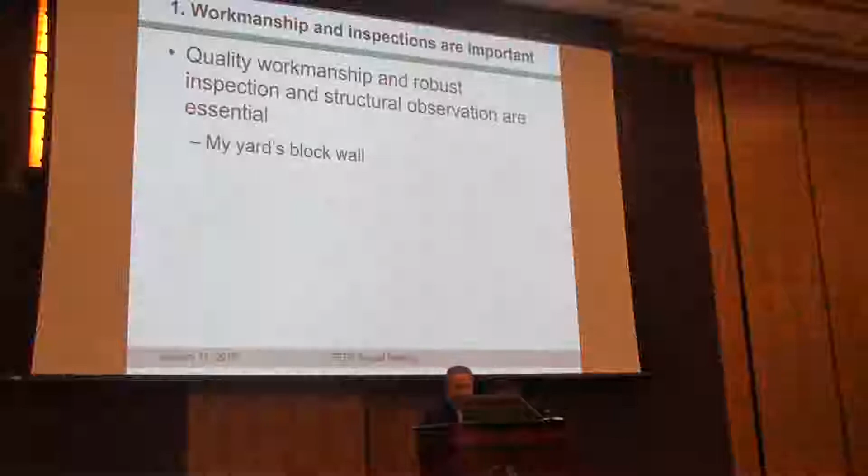I went and looked closer and saw that something is funny: the concrete is in one cell, and the rebar alone is in the next cell. I never imagined the contractor could be that stupid. So I called him in and said, what the hell happened, why did you do this? He said, I was watching you, I didn't think you were going to pour the concrete here and rebar in the other one, so I didn't come up front and look at it.

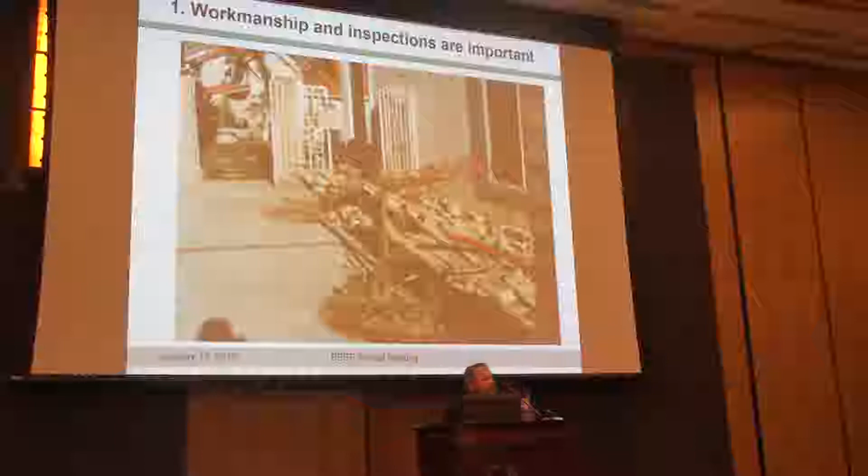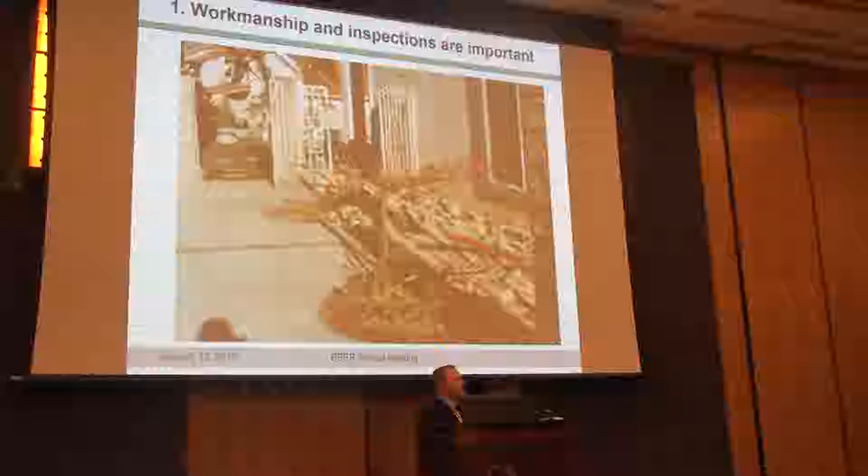And he gave me a very educated lecture on structural engineering concepts. He said, I did this because I wanted to do you a favor — the cell with the concrete was strong enough already, so I put the rebar in the next one so that one is strong too. And I said, thank you very much, please don't practice structural engineering from this point on. Yeah, here it is — that's for you, the rebar alone in one cell and concrete in the next one.

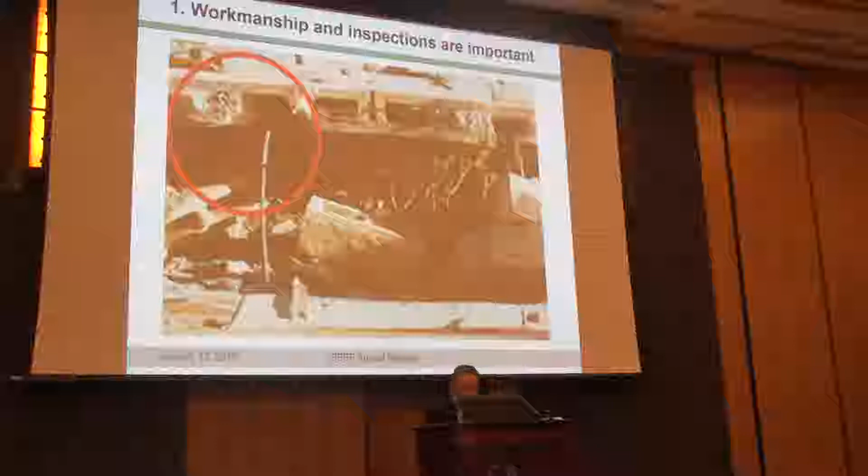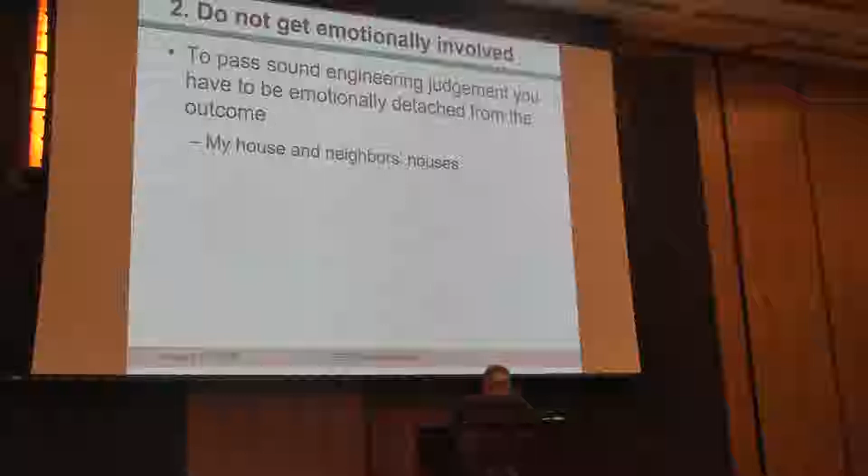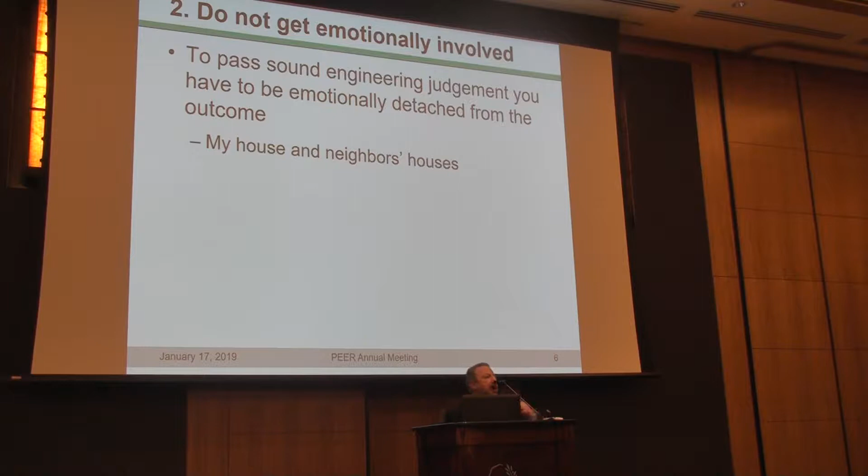Lesson number 2 that I learned from Northridge earthquake is that in order to pass sound engineering judgment, you should be emotionally detached from the outcome. The day after Northridge earthquake, I probably looked at 50 to 60, maybe 70 houses in the neighborhood, and I easily passed judgment: this one is okay, do this, be careful, don't go there. There were a couple that I said don't go in and stay out because they were separating the second floor from the first floor. But when it came to my own house, I really couldn't pass a sound engineering judgment because I would look at it and say, it looks okay, but hey, this is my kid, that's my wife. Should I? Shouldn't I? So I actually asked someone else to come in and pass judgment on my house. That's lesson number 2.

Lesson number 3 is PGA, peak ground acceleration, is important, but it is not that important. My example is this famous seismic station in a nursery in Tarzana, which is close to the epicenter of Northridge earthquake. This particular station's accelerometer graph showed a 1.78 g horizontal acceleration. When you go around that area, there was no damage that would really correspond to that. 1.78 g is basically end of the universe if it is widespread, but there was no damage to correlate to this. So I talked to my seismic friends, and at first they thought something was wrong with this instrument, and then they realized that actually there is nothing wrong with the instrument.

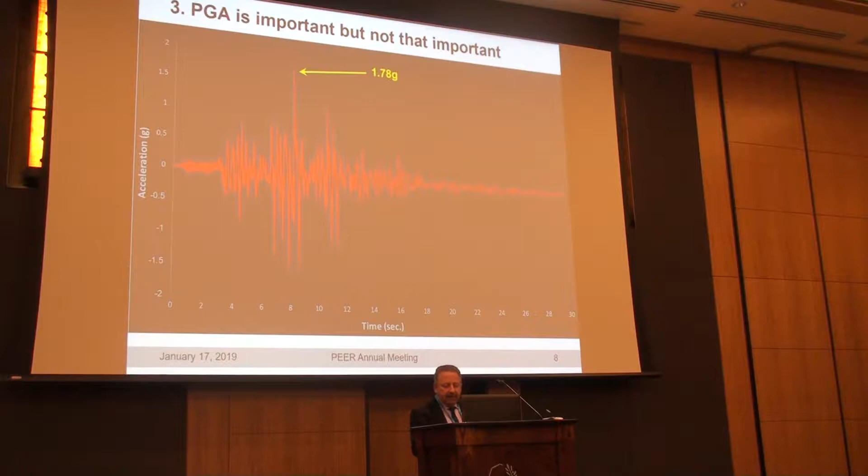If you want to get a little fancier, you can look at the spectra of it. You're looking at 5G spectral acceleration. That's a lot of spectral acceleration. But there was no damage. I don't know exactly what happened. I talked to people, they say probably there was some lensing effect around this or whatever. But what I learned from this was that I look at the PGA, I respect it, but I'm not going to put all my stock in what the PGA reading in one place is.

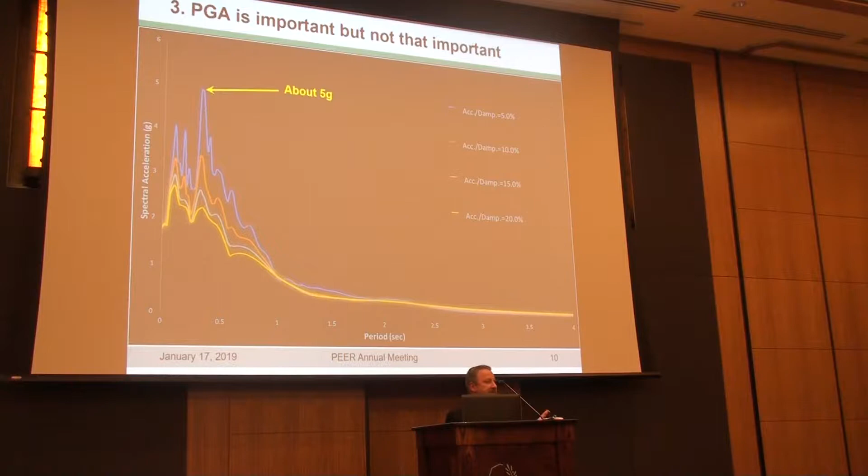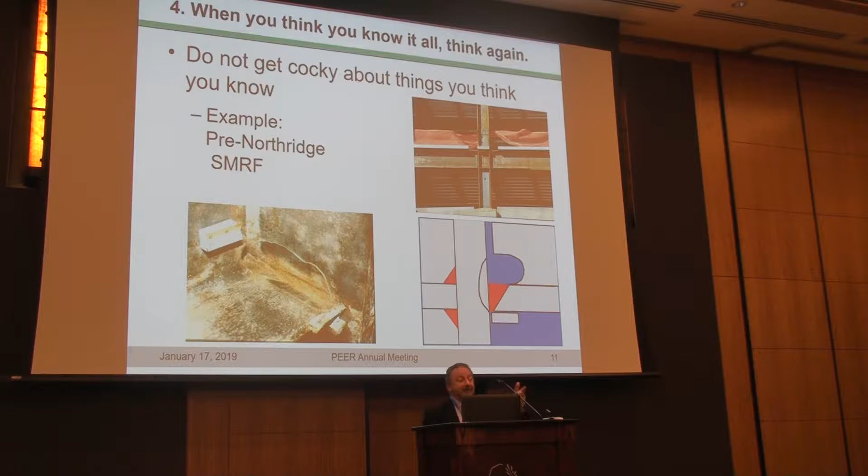Lesson number 4 is that when you think you know it all, think again. I vividly remember, I believed in it, a lot of other people believed in it, that after sliced bread and mom's apple pie, the steel moment-resisting frame is the best thing that has happened to human civilization. Everybody believed that. I vividly remember when Mike Engelhardt published his paper, I think in December 1993, which said something is wrong or fishy with the steel moment frames that we are using. I vividly remember that everybody poo-pooed him, and some people actually were thinking he should resign his academic position. It took just a couple of months for him to be proven right. So that's just one lesson. There are a lot of other things that we don't know, so we shouldn't be overconfident in what we think we know.

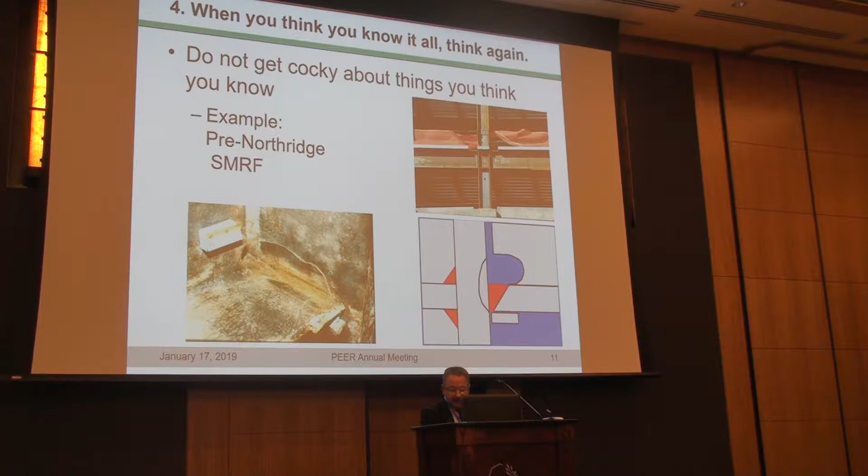Lesson number 5 is you better act when momentum is on your side. People have short memories. After an earthquake, you probably have 6 to 8, 9 months, maximum a year, to get things done through the politicians because the public is on your side. Two years later, everybody is watching their favorite TV show, and they're thinking about putting a roof there and making a new kitchen. No one thinks about earthquakes after a couple of years have passed. So we have to act harder than what we did. We did some good stuff.

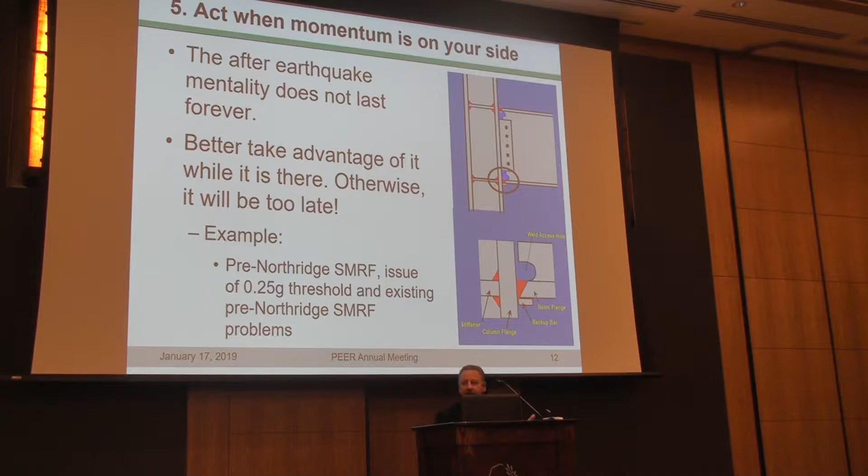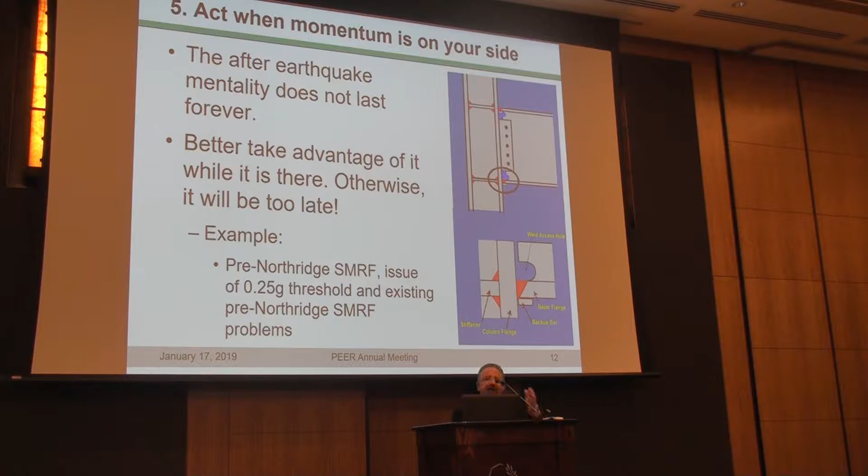For example, for SMRF, we started looking at buildings that were subjected to more than 0.25 G ground acceleration, but we really didn't look at other buildings. We have high-rise buildings in downtown LA that are SMRF, and they have never been inspected. So in retrospect, this is Monday morning quarterbacking, of course, but we should have pushed harder. Maybe next time we should. Rather than waiting 20 years and going for soft story ordinance, maybe that was the time after the Northridge Meadows that we should have pushed hard for it. After waiting 10, 15 years going for non-ductile concrete ordinances, that was the time we really should have pushed for it. Maybe it's wishful thinking, but I really think we should capitalize when there is an earthquake, and use the audience so we can improve their safety. So that was lesson number 5.

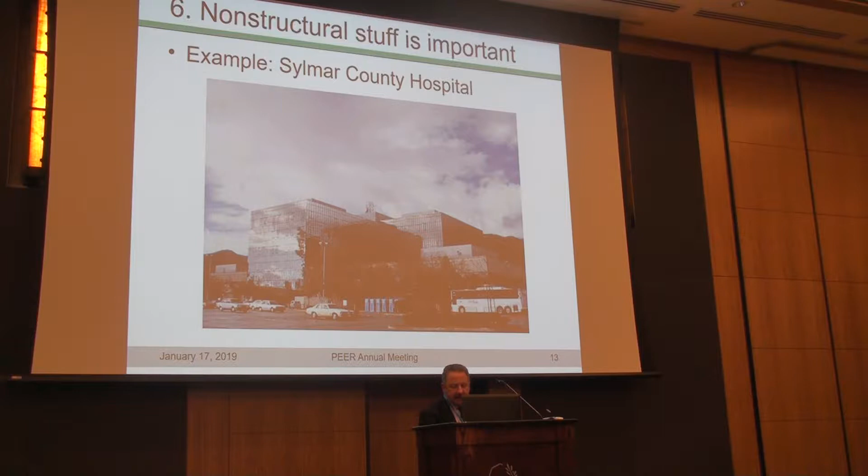Lesson number 6 is non-structural stuff, I'm saying stuff because I'm a polite person, I don't want to use the other word that starts with S, is important. The example is this Sylmar County Hospital building that most of you are familiar with. This was built as a replacement for the Olive View Hospital, which was basically partially collapsed during the 1971 San Fernando earthquake. So the decision was made to build this building at the same location as the other building, and build it in a way that would actually stay operational after an earthquake. So this used a fancy structural system, steel plates embedded in concrete shear walls, and it saw the earthquake. It saw actually pretty good size motion at the base and everywhere else, as you will see.

It saw 0.8 G at the base, which got amplified to 1.5 G at the roof. These are big numbers.

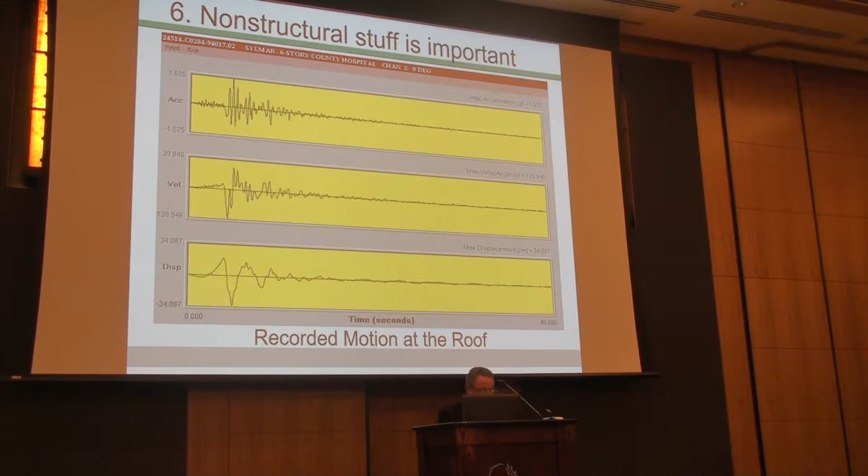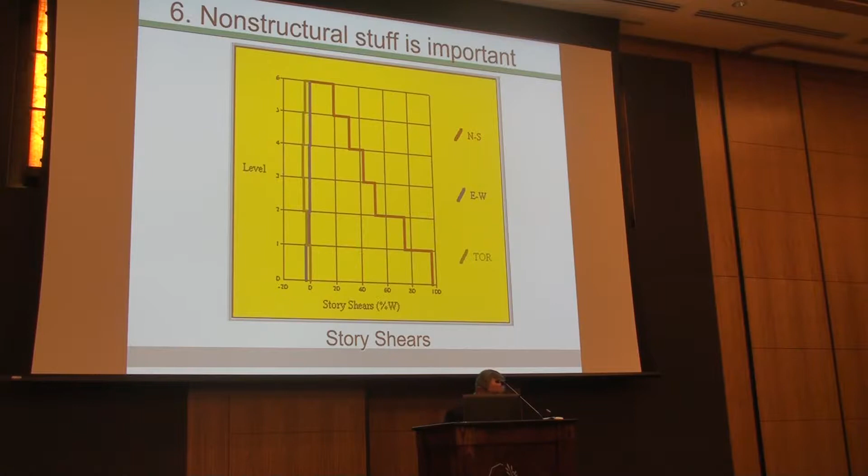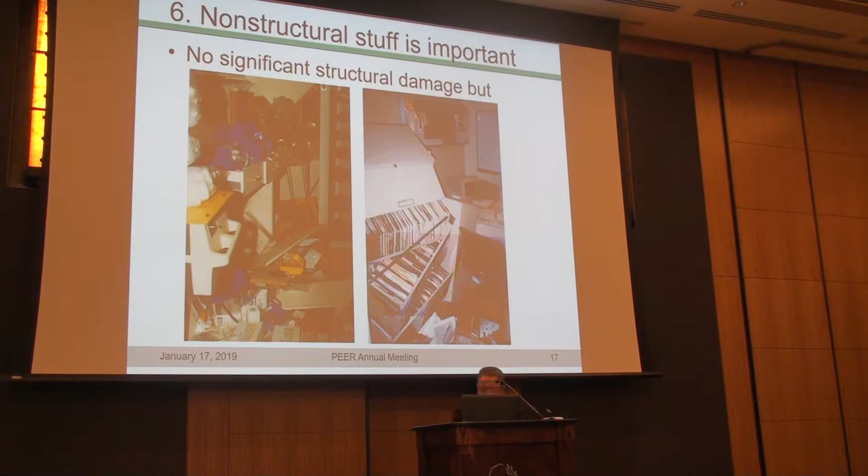I can promise you that this building was not designed to take 90% of its weight in base shear, but it saw it and it survived it. There was minor, if any, structural damage in the building. But nevertheless, they had to evacuate it. The hospital was shut down for quite a few weeks, a few months, because of what happened to the content. It was not functional anymore.

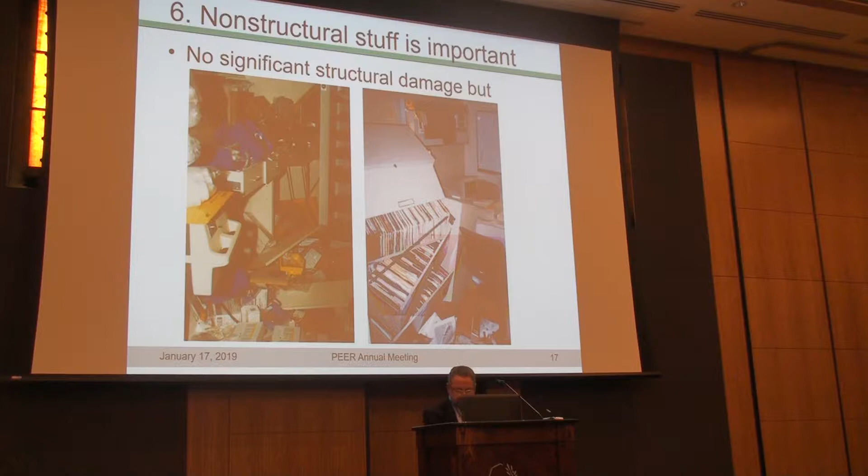That's another one. God knows whose file is whose on that pile there. Unless your mother-in-law's file is one of those, you don't want the files to look like that.

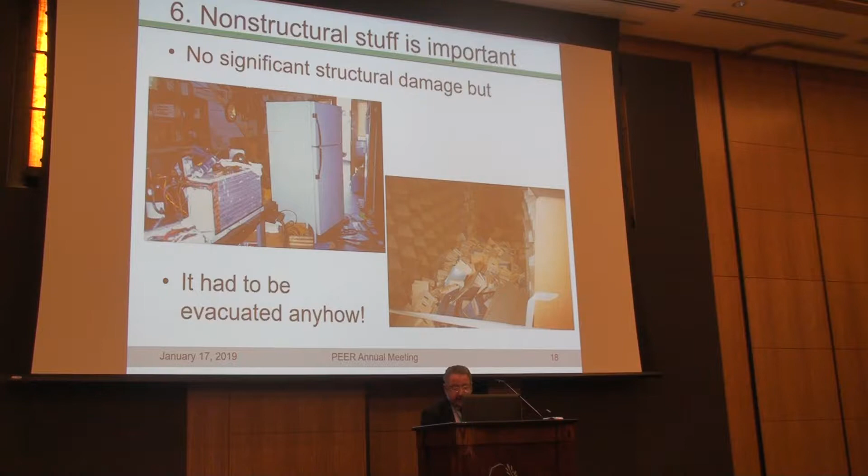Lesson number 7 is seismic instrumentation is a damn good investment. It really pays 100 times over the value of initial investment.

And by seismic instrumentation, I don't mean code instrumentation of putting one sensor here, one sensor in the middle of the building, and maybe one at the roof, because that's not going to give you a lot of information. But sort of extensive instrumentation, the way CSMIP does it, the way USGS does it, the way we are doing it for tall performance-based design tall buildings in Los Angeles and San Diego, that type of investment, which is a very small investment compared to the cost of a structure, is less than 0.5% of the cost of total construction.

You can see a lot of goods. I'm just showing you some examples based on me doing this as a hobby, picking up results of instrumentation and plugging it into some of the fragility functions or things that I know to tell you what kind of information you can get immediately after an earthquake if you have a building instrumented and that data is available. The stuff that I'm showing you is elementary. There are people in the audience using hybrid stuff, and they cook it up into computer models, and there are a lot of other fancy ways of doing this. But at the simplest level, the way I'm doing it with a bunch of very simple fragilities and just data obtained from the sensors, you can get very useful information.

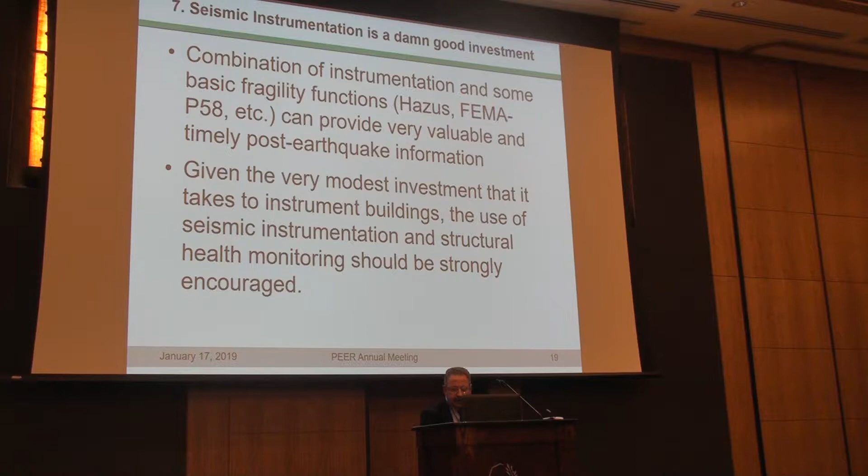Let me give you a few examples. Going back to the same Sylmar County Hospital, and basically using something like Hazus fragilities, just simple Hazus fragilities, you can say that this building, this is a 6-story building, this is the east-west, this is the north-south. You see that even based on Hazus fragility stuff, this building didn't see severe structural damage.

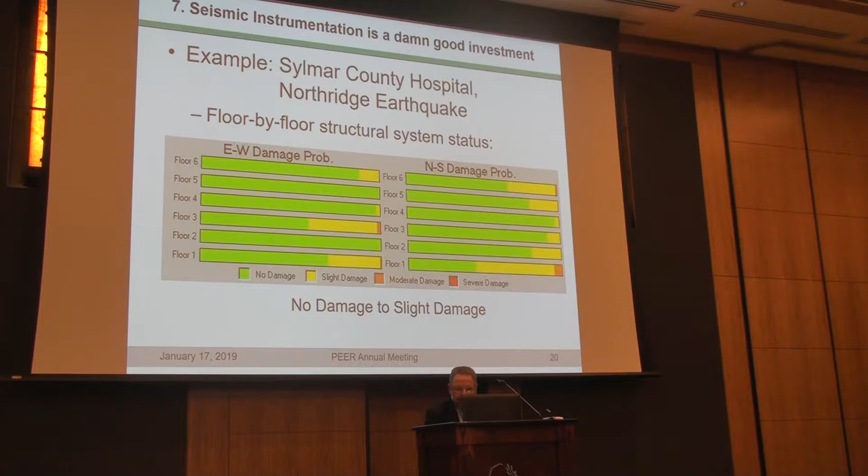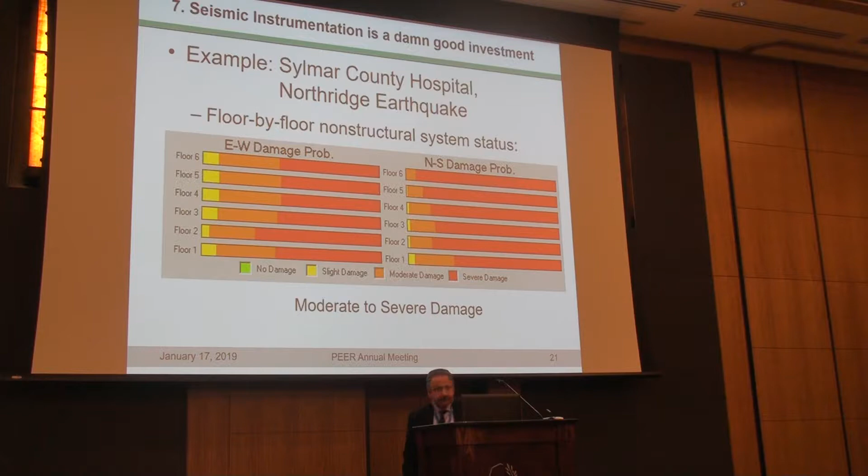Now, if I look at non-structural components using the same simple fragilities, just using the sensor data, you see that this building is in big trouble, non-structurally. And this can be available 30 seconds after the earthquake.

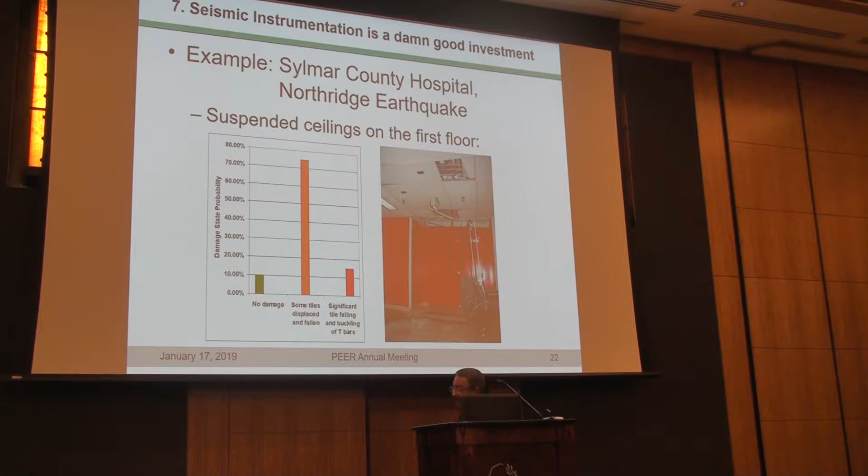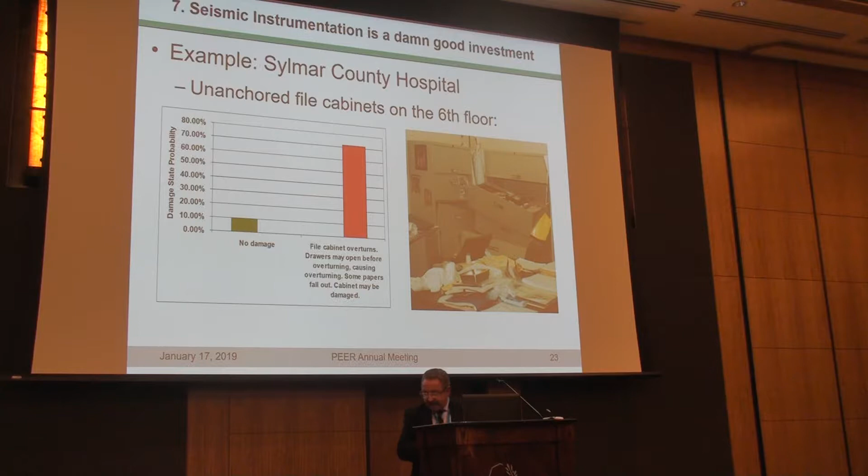If you want to get fancier, you can go to stuff like FEMA P58 fragility functions. And then, if you plug in the values that you are getting from the sensors and the fragilities for suspended ceilings on the first floor of this building, you see that there is a 75% chance that some of the tiles are displaced and fallen, which is, I think, what happened. Or 60% chance that on the 6th floor, your file cabinets are in the status that you are seeing. Or your computers and desktop stuff have a 90% chance of not functioning. These are very useful pieces of information that you can have within a few seconds or minutes after the earthquake.

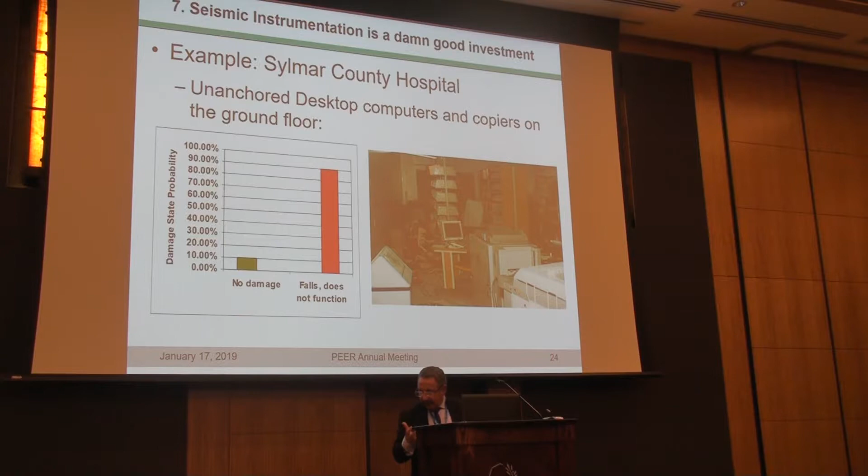And we should really, as a community, push for extensive instrumentation in at least sizable buildings that we build: public hospitals, any important facility, any large building, or even any shopping mall where a lot of people are present. We should push for instrumentation to go forward.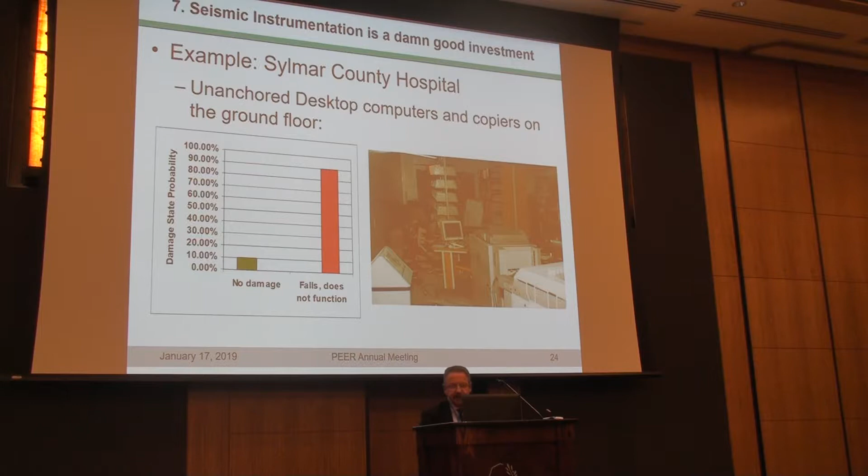And again, using simple ones, let's go to downtown LA, this is the Northridge earthquake. If you just look at the sensors, plug it into one of these simple fragilities for this 52-story building in downtown LA, you see that all the chances of severe damage are almost non-existent. There is a possibility of slight damage. And if you are really looking for damage, please go to the middle height of the building, because the chances of having damage there is more than having it either up or down. So these are useful pieces of information to have.

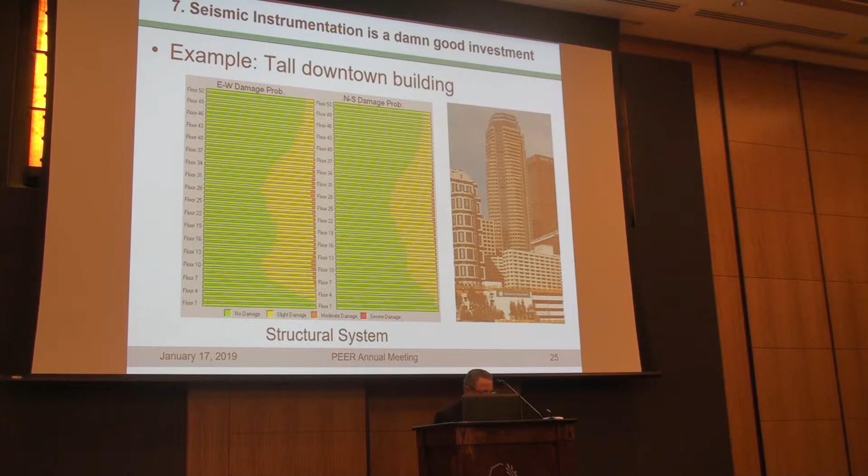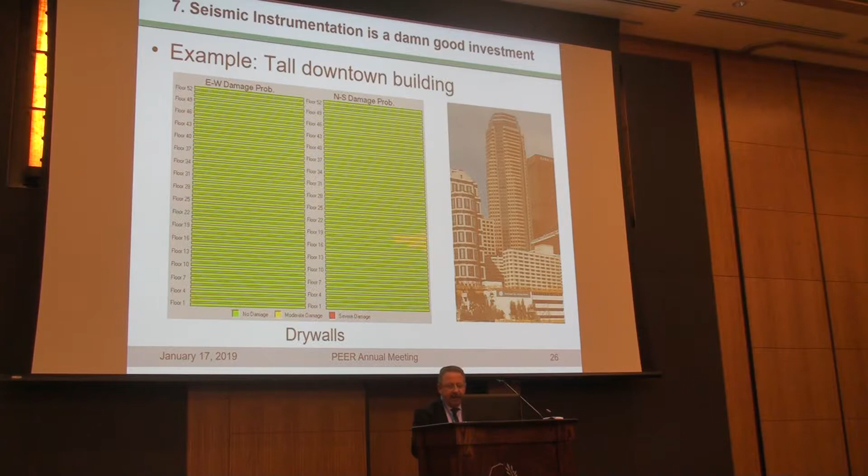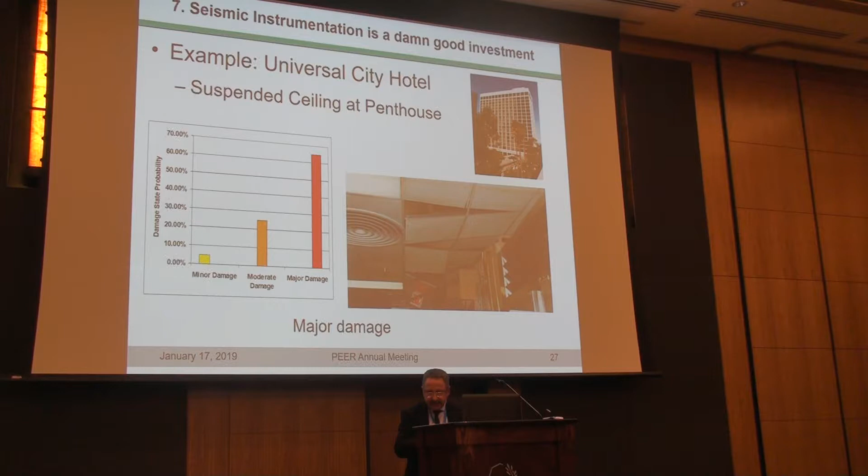That drywall, for example, there is a chance that you have some damage there. Or another building at a hospital, in a hotel in Universal City, and again, you see the same thing. I'm showing this to show you that this is not building dependent. It's not that I got lucky with Sylmar County Hospital. Every building that I picked, using instrumentation data with some simple engineering concepts, fragilities, whatever, you can get really useful information out of it.

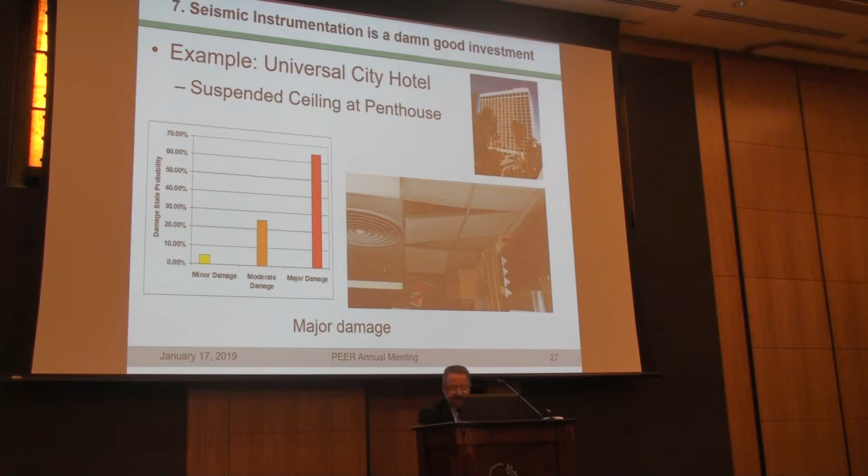Lesson number 8 is a lesson that Professor John Wallace talked about. And that is, ductility is important, but it's not everything. You can't have a column more ductile than this, but everything else has to work with it, as John said. You need deformation compatibility. So ductility we need, but if you are ductile, you are not necessarily safe.

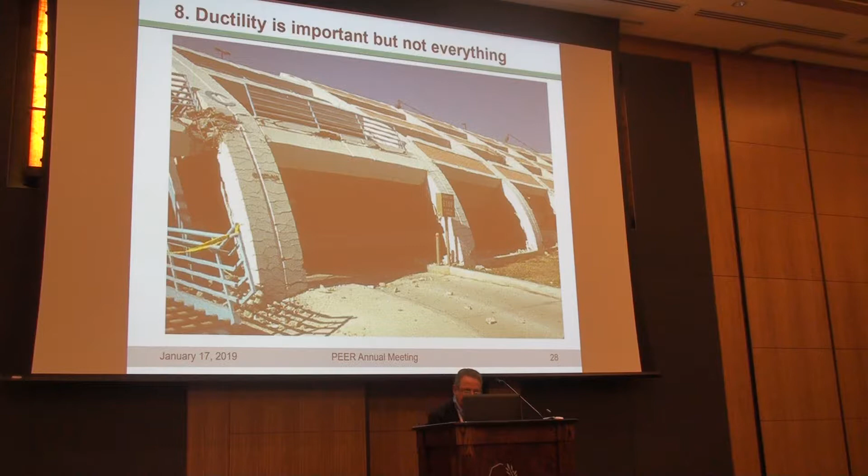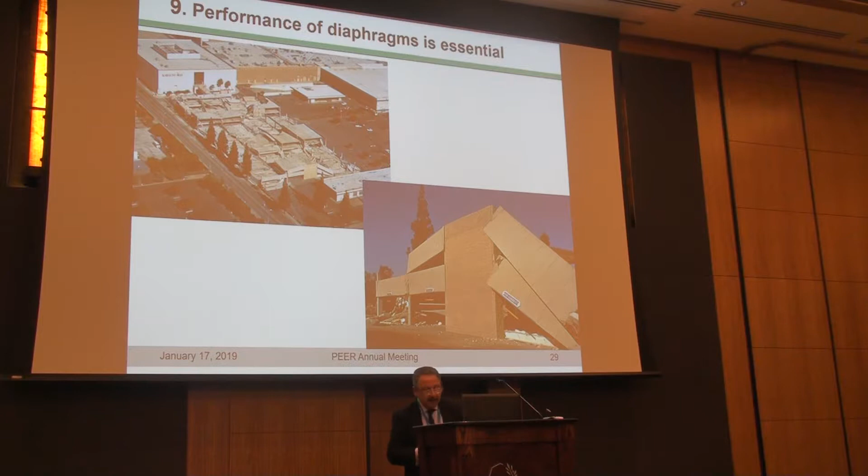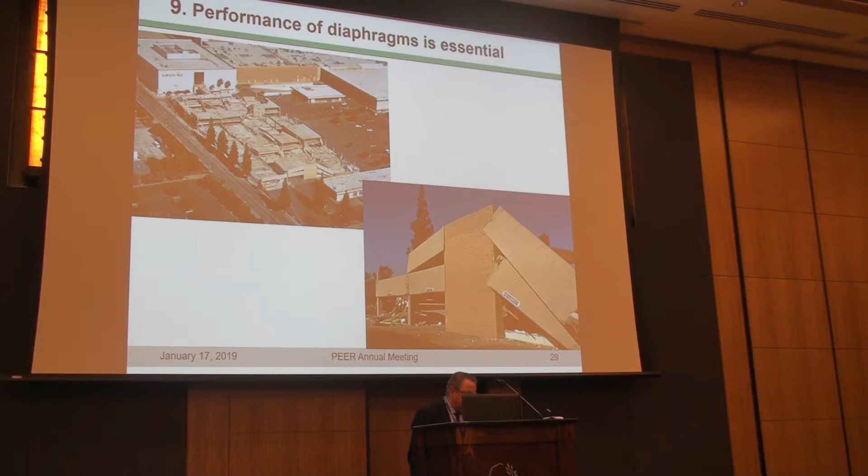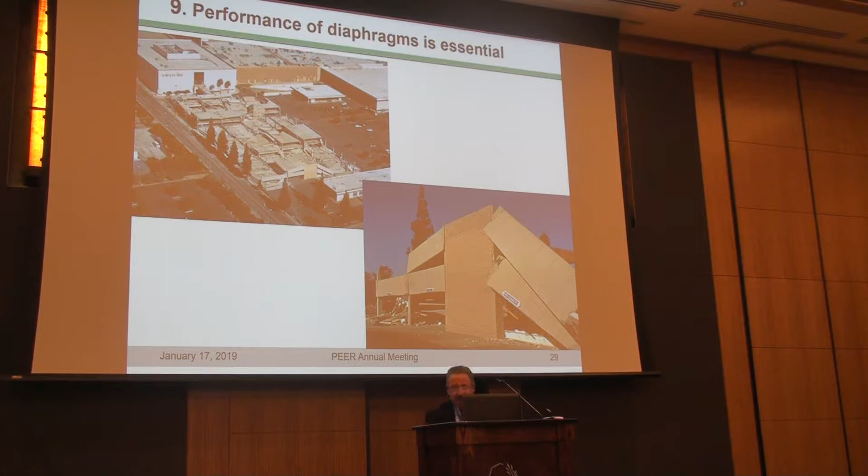Lesson number 9, performance of diaphragms is essential. Lateral resisting elements don't do anything if you don't deliver forces to them. This is a 3-story parking structure at the Northridge Fashion Center. My wife used to take my then 4-year-old daughter to that mall every day and parked exactly there. The earthquake happened early in the morning, so nobody was shopping and nobody was killed. But from the shape of this wall, you can see that it didn't really see any forces. Diaphragms should be intact, they should not deform too much, they should not separate from the walls.

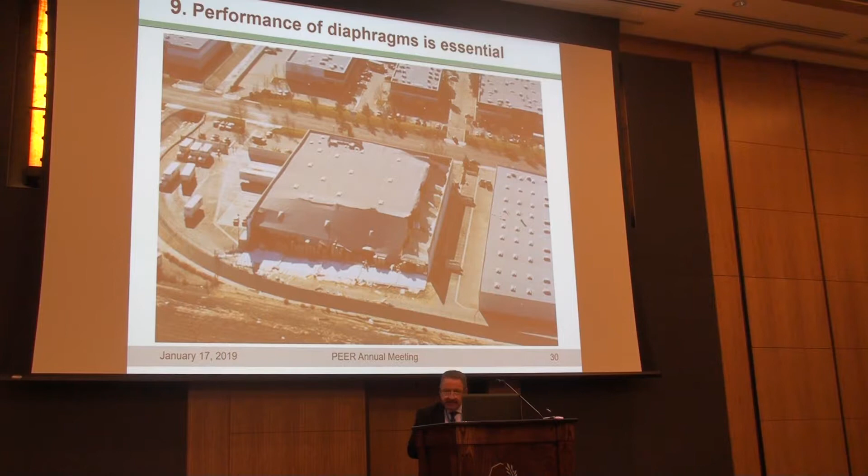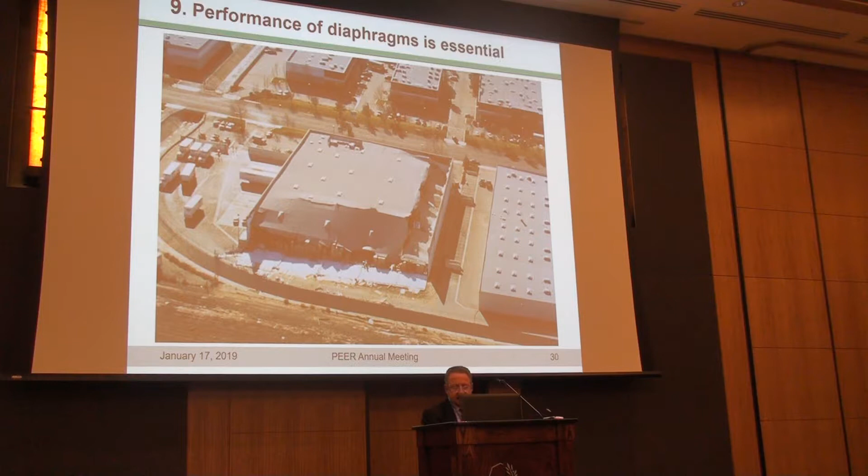All of us know that the pre-Northridge steel moment resisting frame buildings got cracked up, seeing much less forces than we anticipated that they could safely take. But this is one side of the story. The other side of the story is partially covered in lesson number 10: do not over-rely on design calculations. They might not tell you the entire story. That's one side of the story from SMRF. This is another side of the story.

These are 3 buildings. The Burbank 10-story residential building is a shear wall building. It saw 34% G at the base. It was designed for 14% - this is ultimate strength design for 14% of the base shear. So it saw way more than twice what it was designed for, but the level of damage was insignificant.

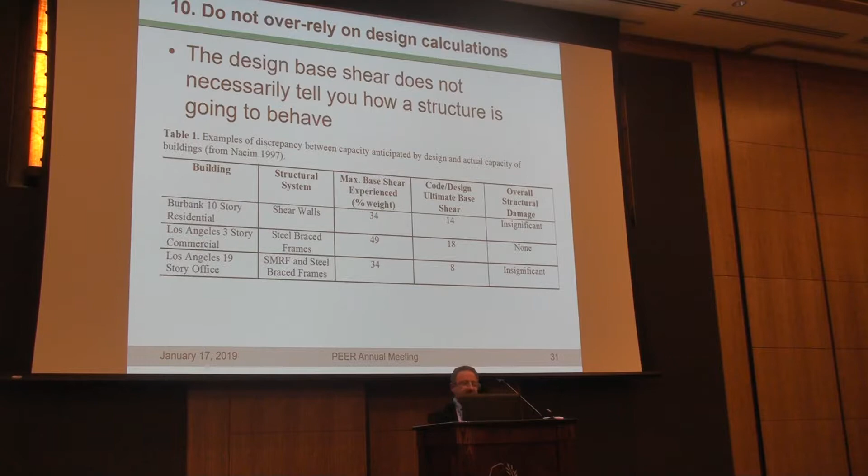The 3-story commercial building is a shopping center in Century City, a steel braced frame. During the Northridge earthquake, it saw about 50% G at the base, but it was designed for 18%. No structural damage. Another one, the 19-story office building, is a steel braced frame and SMRF building in Century City. It saw 34% G, designed for 8%. It had a couple of buckled braces near the roof, and that was it.

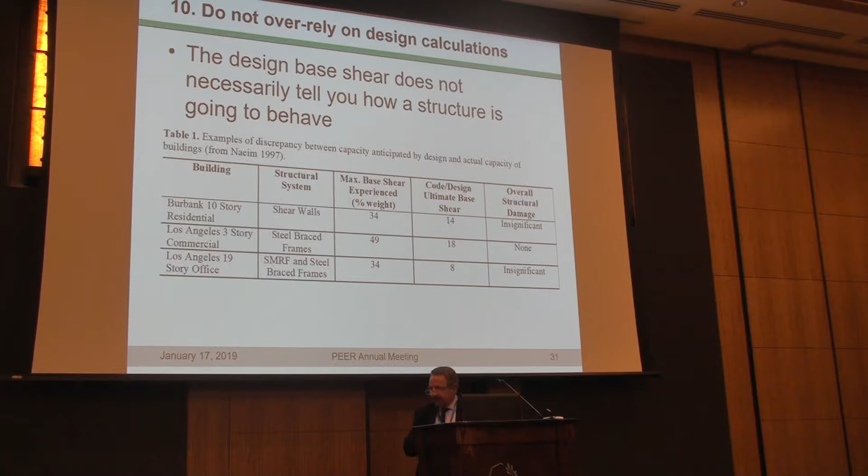So I won't rely on design calculations to tell me the status of the building. I have to go look at it.

Lesson number 11, take a little time and ponder before you respond. After an earthquake, if you are a practicing engineer, you are going to be swamped with calls. Everybody you ever worked for, every client, potential client, their neighbors and their friends are going to call you. You'll get thousands of calls, literally, within a couple of days or hours. You need to decide how you are going to respond, how you prioritize, which one you go to, which one you don't. At that time, this was not easy to determine because we didn't have, for example, shake map. The damaged area is not necessarily where you think it is - it's not necessarily close to the epicenter. We had areas of damage in West LA, in Santa Monica, which are far from the epicenter of the Northridge earthquake.

So right now, before I answer any calls, I look at the shake map, because the shake map sort of tells me where are the areas I need to be vigilant about. If somebody calls me from an area that is very green on the shake map, I tell the guy to wait another day, I'll see you tomorrow. If the guy is in the real red zone, that's where I'm going first.

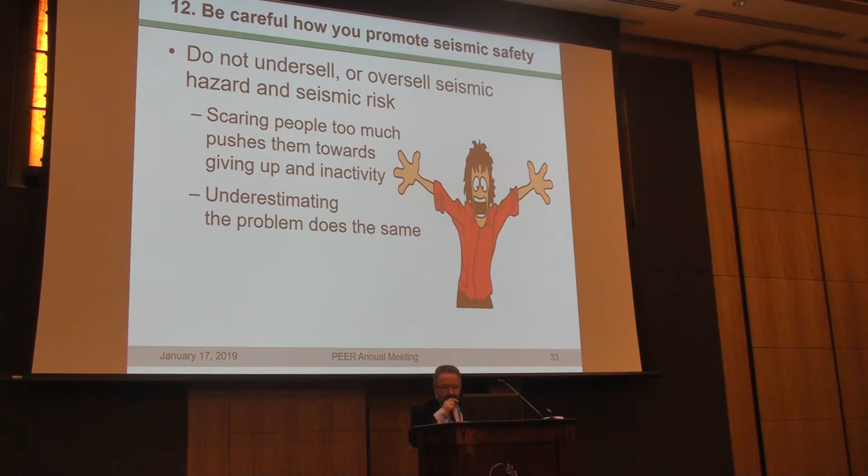The last lesson, lesson number 13, is the time has come to move on from traditional objectives. This objective we've had for many years was designed for life safety, which we know as engineers, but 90% of the public doesn't know that. They think we are designing earthquake-proof buildings.

I vividly remember in Chile there was a remarkable, good performance of engineered structures. When I saw that, I thought structural engineers in Chile were going to be treated like heroes. I was so wrong. People hated anybody who had anything to do with engineering, because they thought that by ordinance of the government, new buildings had to be earthquake-proof. So the earthquake came and a building was damaged. Even if the damage was minor, the owner thought he or she was sold a lemon. Everybody was unhappy.

That was for one of the best performances of structural systems that I have seen in my life, given a major earthquake. So there needs to be a balance between what we are doing and what the perception of people is of what we are doing. If people really want buildings that are repairable and functional, if they really need a community which is resilient and can go back to work after an earthquake, we can't afford to have $40 billion, $80 billion in damage when we face a magnitude 6.7 earthquake. That just doesn't cut it. This might be good for somewhere else, but it is not good for a major metropolitan area in a very advanced country.

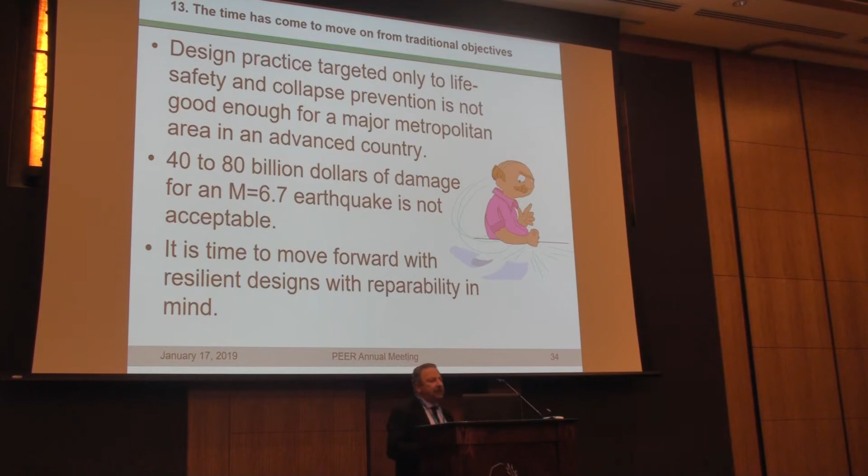You mentioned we should encourage people to do instrumentation. But are you going to encourage that without funding, since people don't want to spend money if they don't have to? It's a very good question actually. We do it in Los Angeles, for example. Most of the tall buildings being designed these days are designed using performance-based design, and as part of that we require them to do extensive instrumentation—they can't do performance-based design without it. I believe we can educate people by showing them the benefits of instrumentation they would get. I don't think you can force people and just tell every 3-story building owner that they have to put instrumentation in. But there is so much advantage they can get from this—not just for us, the data from instrumentation can be mixed with other security systems and such. I think there is a market there for smart structures, and it should be treated as a marketable thing, creating an environment where the population is receptive to it. I think that's the way it should go.

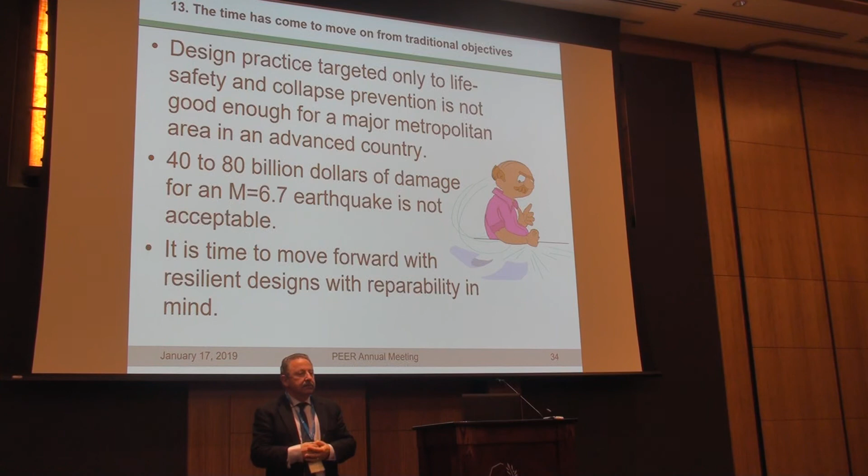Any other questions? This is a tough one. This I want to dodge.

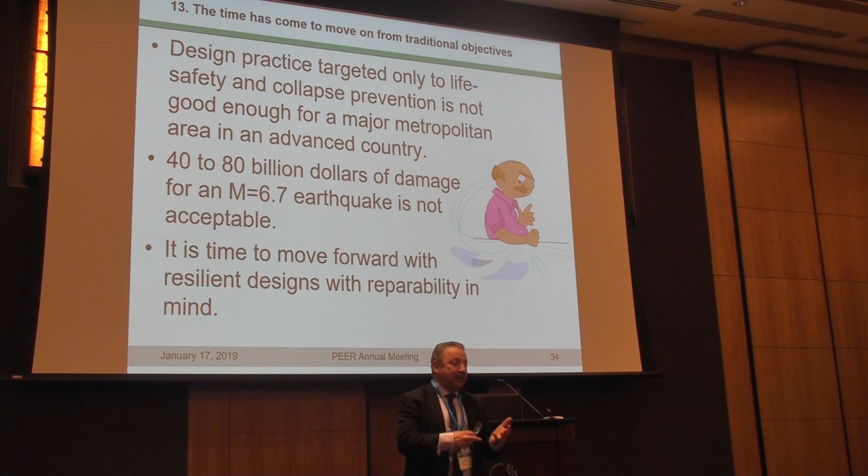So, Farzad, you said that a family member shopped daily at the Northridge Fashion Center. Yeah. Did the collapse of that parking structure have any impact on your household budget? And is there another lesson we can add to your speech? That question assumes that I was either in control or aware, which I was not—my wife was in total control of everything, so I didn't know anything anyway. That's the right answer. Thank you.